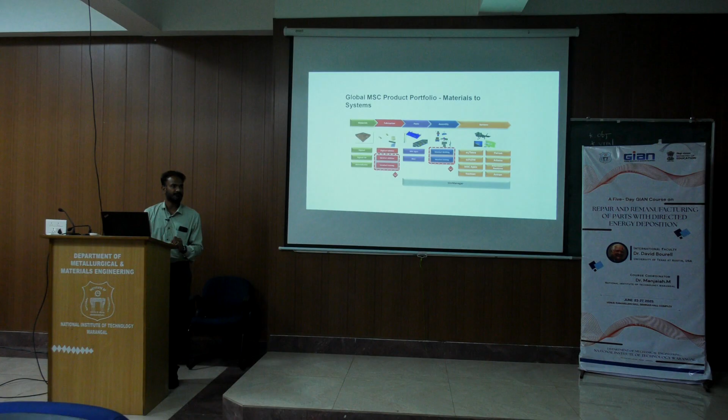And then system-related things. System-related things is your FEA analysis, like CFD analysis or structural analysis and so on. We have scFLOW for CFD analysis and Nastran and Patran for structural analysis. And people interested in multi-body dynamics, that is addressed by Adams software, and also acoustic simulations, which are addressed by Actran software. So these are the various tools that we have.

So now, since our point of interest is on Simufact, that is mainly used for additive manufacturing solutions. So that is our topic for the day. I'll be giving you an overview of what Simufact is, and then we will proceed to the specific applications of Simufact for additive manufacturing, whether direct energy deposition techniques or powder bed fusion techniques.

So Simufact basically stands for simulating manufacturing, or we can say it's the manufacturing division of MSC Software. MSC Software is a part of Hexagon company, and they are doing the development for this particular tool. Simufact supports metal-based manufacturing processes. It can be welding or any kind of forming analysis, or additive manufacturing.

And the technology behind Simufact is nothing but the Marc and the Dytran solvers. These are multiphysics solvers which have been in the market for a long time. Marc is a multiphysics nonlinear implicit code, which is mainly working behind Simufact to solve our multiphysics problems. Then we have Dytran solvers also, which can be used in forging or hot forging simulations and things like that, where it is an explicit solver.

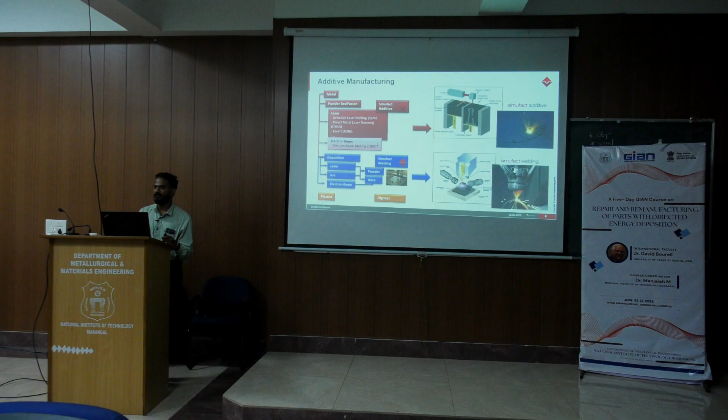The deposition techniques are nothing but our DED techniques, which I was mentioning in the morning sessions. All those can be solved using the Simufact Welding module. If plastics or composite materials are involved, we have a module called Digimat which can solve FDM or FFF kind of simulations using Digimat plastics. So these are the different modules or tools that we have to solve different kinds of problems. Coming to our next slide, I will give a brief overview.

Coming to the next one. So whenever we are performing metal additive manufacturing, whether it is a PBF process or a DED process, there are many challenges that come into the picture. Can those challenges be addressed by doing a virtual simulation? Or, in real life applications, to arrive at a result we might do several trials and errors using the machine or the technology, and then go back and do rework using physical prototyping or physical testing.

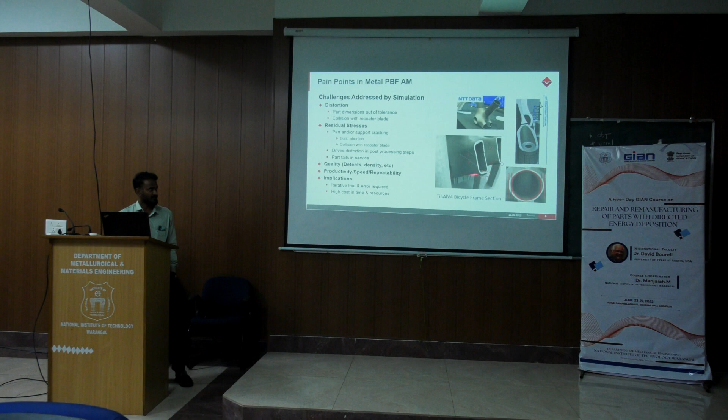Whenever we use powder bed fusion methods, we have the part as well as support structures. The support structures are much less dense compared to the part we are trying to manufacture. This can cause issues like cracking or failure, or parts going out of tolerance due to rapid heating and cooling as they are manufactured layer by layer. How can we address this? We can address it up to a certain extent by doing a simulation.

The additive manufacturing workflow to date is something like this: you have a design, suppose an automotive or aerospace component, and you want that design to go into manufacturing and then use it for your application. So we design the component and try to build it, using LPBF or DED methods.

We build the components, then inspect them for any failures or defects. Once you have identified defects, or something like a part going out of tolerance, we need to repeat this process again. We need to either change the design or modify the build strategy.

You have to modify your scanning strategy, or we have to modify our heat input strategy or heat input parameters. So this is a very cyclic process. We have to do many trial and error to achieve a successful component which is able to perform in the real life scenario. So this takes a lot of trial and error.

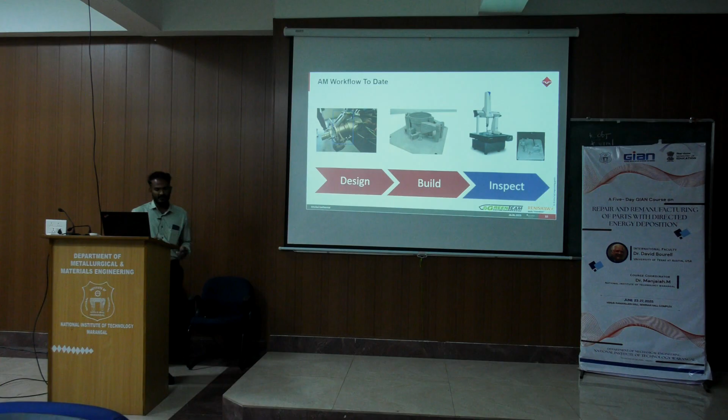So what if we can include an AM simulation in between your design and your actual build? We can create an AM simulation, and we can detect these kinds of defects in your virtual simulation, such that all these building and inspection efforts can be reduced. Okay, that is our main idea of doing a simulation.

So if you are able to find out these things using a virtual simulation, we can always go back to our CAD design. We can modify the design, or we can modify the build parameters, and then we can analyze it. We can arrive at a product, a build with less errors, which can be finally sent back to the build, and then we can continue our design or inspection process.

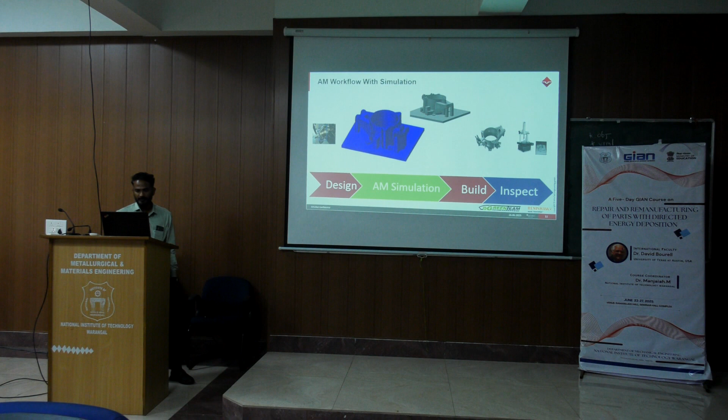So this will reduce our cycle in which we are investing in trial and error, testing or things like that. So there the simulation comes into picture. This is where we are going to use the simulation as an added or complementary solution to reduce the efforts in manufacturing.

So in simulation, there are several scales by which we can do the simulation. It depends on the type of simulation that you are doing, the kind of results that you want, or the computational effort that you are looking for. So here they have divided this into three main simulation types: macro scale simulation, meso scale simulation, and micro scale simulation.

So macro scale simulation is nothing but a purely mechanical simulation where we are trying to capture something called inherent strain, which comes in the components when the component gets printed. These inherent strains can be purely mechanical, and they can be material specific and machine specific, when we are talking about the macro scale.

So why we use macro scale is it is a very less time consuming process. We can easily do experiments to capture the material behavior to make your physical print, and it delivers the distortion and stresses. So if our aim is to study the distortion and stresses on the part, we can use the macro level simulations, which can be easily solved for additive as well as welding technologies.

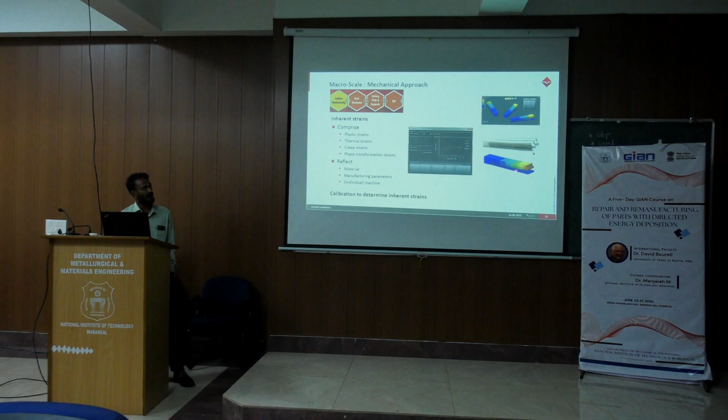Okay. So what we are trying to do here is, in the simulation we can't capture all your machine parameters. There can be n number of parameters when you are actually printing a part or using a particular machine. So how can we reduce all those parameters for our analysis so that we can match our experimental as well as simulation? That is what we are trying to do here in the calibration procedure. So after you calibrate, you can do the analysis.

So the analysis, as I said, can be the macro level, which is the mechanical analysis, or if you want to study the thermal analysis, where you want to capture the thermal behavior of the component layer by layer, we are able to capture it. So what does it enable us to predict? We can predict distortion, stress which is coming on the part, supports or the base plates, okay,

as well as peak temperatures, whether our laser parameters are giving us the right peak temperatures to melt the powder, or whether the proper fusion of the powder or the wire is happening. These kinds of aspects can be studied here using the heat flux and peak temperatures. Likewise, we can use the thermomechanical approach to study the part behavior.

So here we have a part which is getting built. Here we can see the layer by layer. This is a PBF process actually, which is solved using Simufact Additive. Okay. So here you can see we're building the part. It works on a technology like the element activation layer technology, where each and every layer is activated based on the type of input that we are trying to give here.

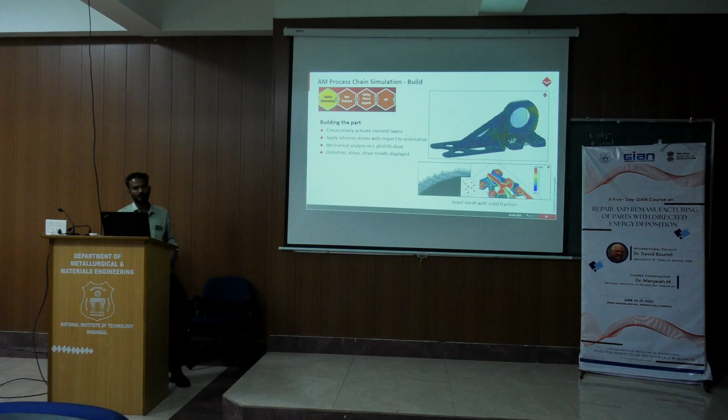Okay. So from this analysis we can study the distortion, stress, strain and displacement results, and we can study deviation. For most of the parts which are manufactured using the powder bed fusion technique or the DED techniques, the main challenge is addressing the distortions, as we had seen in the earlier talk given by Ajay. So how can simulations be used to reduce these kinds of distortions? We can study using these techniques.

And in addition to that, the part might be subjected to something like heat treatment, because initially when you build the part it can have residual stresses which are highly responsible for cracks or failure of components during the operating cycles of the part. So heat treatment processes can relieve the stresses. So we have methods to relieve the stress using heat treatment techniques.

Whether it can be something like stress relief heat treatment, or it can be specific heat treatment technologies which we want to simulate, something like quenching or HIP, technologies with respect to these temperature over time kinds of scenarios. We can simulate it using Simufact Welding as well as Simufact heat treatment knowledge.

So you can see here how the equivalent stress buildup will happen after the part is getting printed, and after the heat treatment is done, how the stresses can be relieved from the part, which will improve the material characteristics of the component. Okay. So for this we have several creep laws, etc., which can be input into the software. Based on these creep laws, it will calculate the stress relief heat treatment.

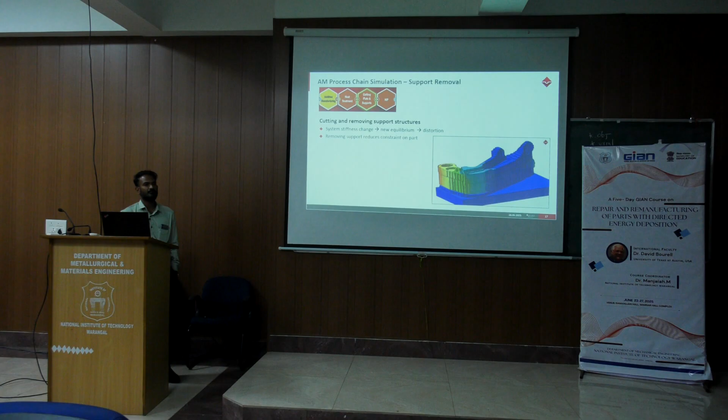So sometimes we use the base plate, we do the heat treatment along with the base plate, and then we take the measurements after cutting. So several methods can impart several differences in the behavior of the components. So those kind of things can be addressed using the Simufact modules.

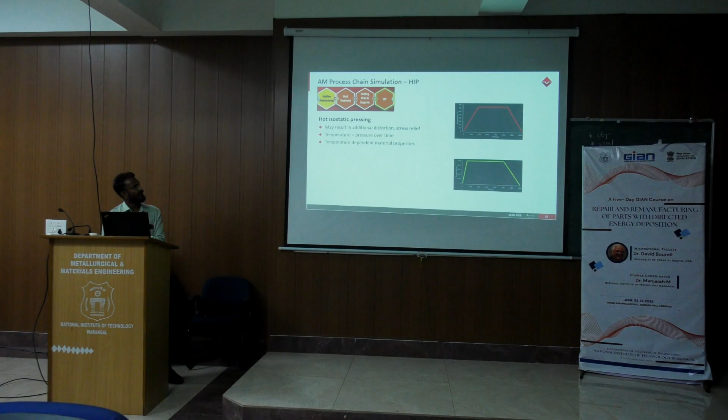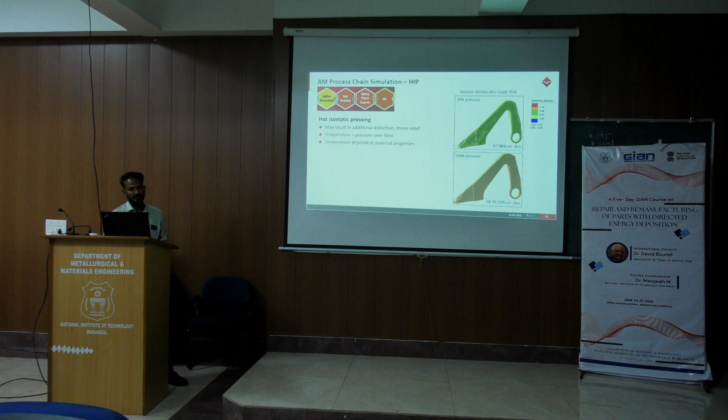And then we can also study the hot isostatic pressing heat process, which is most commonly used in powder-based manufacturing processes, where we provide the time as well as the pressure over time data, and we can study the relative density of your build before as well as after doing the densification. So it uses some densification formulas to arrive at the relative density of your part.

So all these things can be used to optimize your AM process chain. So mainly it involves additive manufacturing, or whether we are doing a heat treatment, then we are cutting and removing the base plate, or doing a heat process. Everything can be analyzed virtually in the Simufact Additive environment.

So how it helps is, for example, we have to do these different scenarios in a physical way. For example, let's say we are having a part like this. We have a few support structures which are modeled here, and we are trying to print it. Then we find that there are some distortions coming on the part. So let's say we are telling, okay, the support structures are more. We want to optimize the support structures such that we get less distortion at that particular part.

So how can we use this simulation? We can use the simulation to do support structure optimization, to optimize the amount of support structures or the areas where the support structures are necessary to reduce these kinds of defects or issues which can come in the reliability. So support structure optimization as well as part optimization can be done using the Simufact Additive tool.

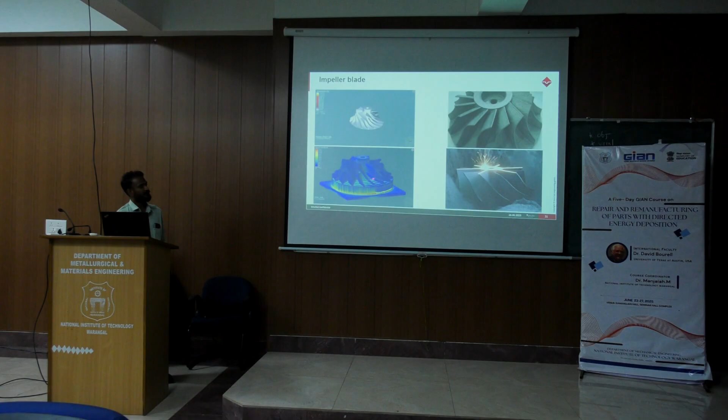Here we can study the temperature distribution as well as the effective stresses when you are building up. And also you can see the stresses that get involved during the different aspects of the build. So after the build we are doing the cutting operation, and then the support removal will happen. So at the end we can study the stresses which are coming on the component.

So here we have the component, and it is something like a suspension upright bearing carrier. The goal was to get this part printed using additive manufacturing technology, and whether this would be feasible or not. So if you take an automobile or vehicle like this, whether the component will survive the loads which are coming on the vehicle or not, we have to study. That too by using a

powder bed fusion technique. So here the material used was Ti6Al4V, the titanium powder, and tool steel was the base plate for this particular build. And it had around 5 lakh elements, and around 82 layers of elements. And the thickness of the support is 0.3 mm.

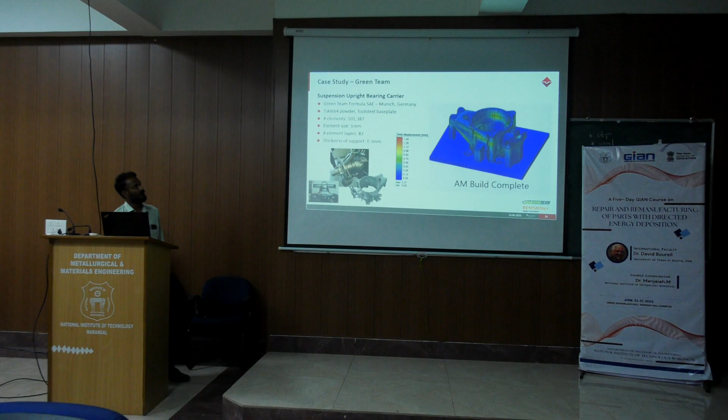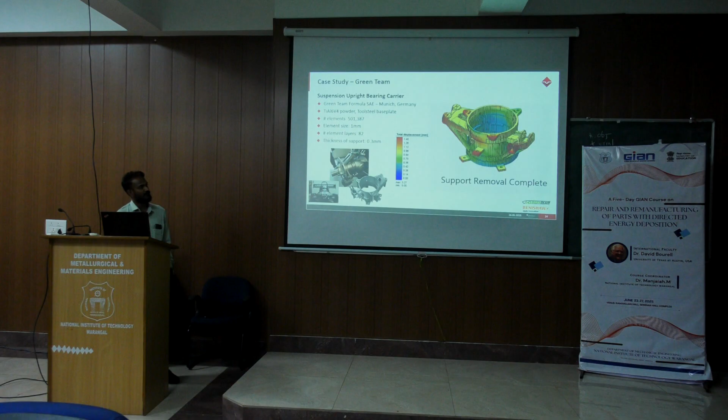Okay. So these are the inputs that we need from an FEA perspective. We need to discretize the model and make the necessary element count so that we can study the behavior of the component when we are building the part. So on your screen you can see the component getting built, then the base plate is removed, the support structure removal is done, and then the further processing is done.

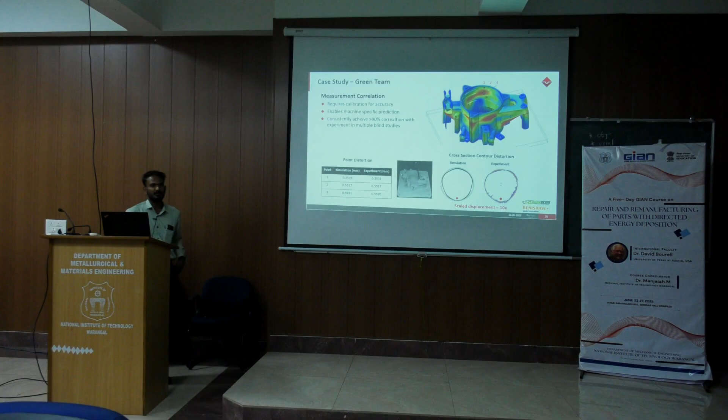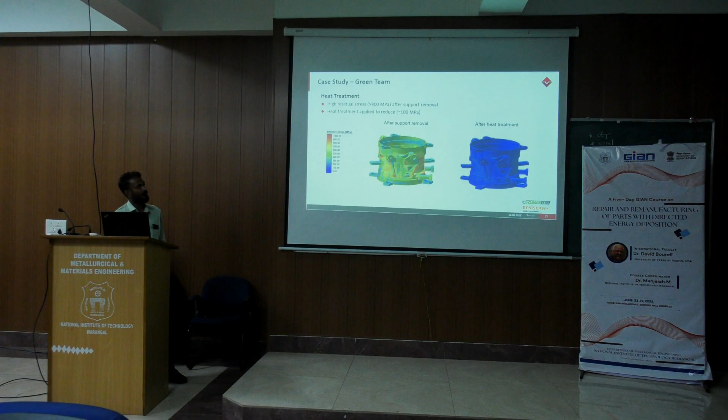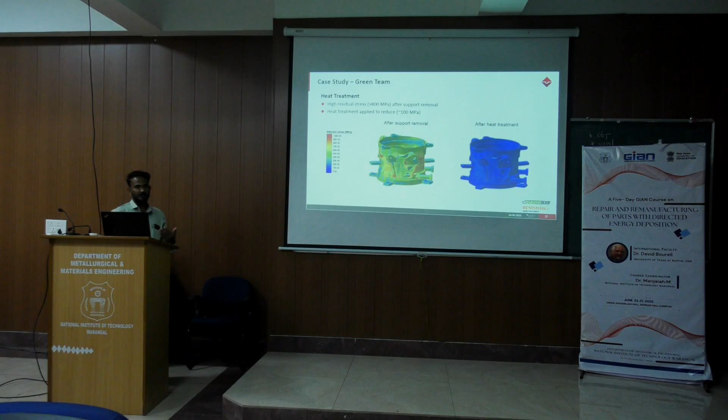So this was done for different stages, like the build stage, base plate removal stage, and support removal stage. Different studies are done with respect to residual stresses as well as displacements. And heat treatment has to be done because building any component using laser-based techniques will involve residual stresses in the component. So how to relieve those? We have to use a heat treatment cycle to remove the residual stresses. So that is being shown here.

Then one more aspect is cracks, like a crack which is forming between the support structure and the component. So that can be predicted using the software. Simulation can predict cracking at local locations like these, or we can identify high risk locations and conduct a virtual trial to reduce the risk.

So after building the print, if you are finding these kinds of issues, you have to go back and modify your input parameters. That will involve the cycling process again, using material and the time required to build these kinds of components. That can be very much reduced if we are doing a simulation, where we can identify such issues well in advance. Okay. Then another aspect would be, even if you have built a part, like we had seen this morning, we are doing optimization studies to make the components lightweight in nature.

Okay, lightweight in the sense like using additive technologies, where the conventional part, which is shown something like this, can be optimized with respect to the weight such that we can remove material from the component, while maintaining the performance or strength of the component, so that it performs in a similar way as the real or conventional component.

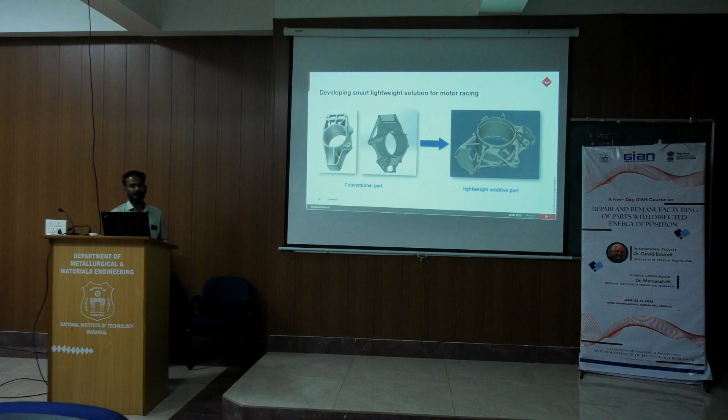So for that we do topology optimization studies, where we use the loads and constraints on the component to study where material is not required so it can be removed, and then we build the part, we study the part, and finally we decide whether we can use this particular part for the actual component. Okay. So for this several studies can be done.

For example, using topology optimization, we can make multiple design concepts like design variants. Okay. So the topology optimization tool will give you a number of design variants. In these different variants, if you observe, there are slight variations in each and every design. So which is the most apt or most suitable design you can use?

It has to be studied using virtual manufacturing as well as further FEA analysis. It can be stress analysis or fatigue analysis. Several analyses have to be done to arrive at a solution. So that can be done further to the printing or the virtual printing analysis.

So in this virtual printing analysis, when we are getting these different variants, which is the best variant we can pick? Some variant might give you less weight, but it may not be feasible to use aesthetic-wise or part performance-wise. It cannot be used in the real-life scenario. So we cannot always judge based on the weight reduction.

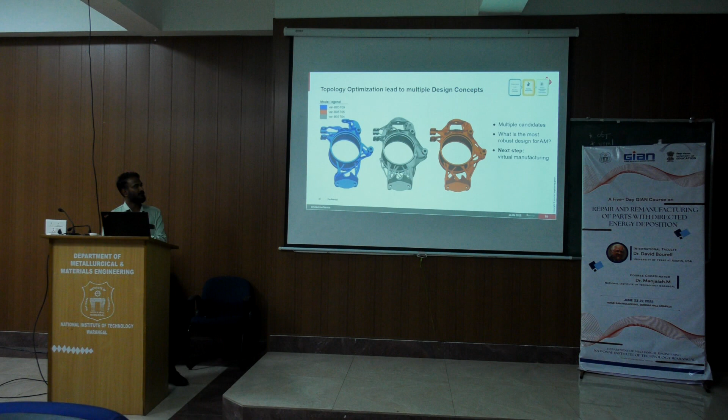We have to consider many other aspects, like multiple FE analyses, whether static analysis or dynamic analysis, and then we need to arrive at a particular design. Okay. So here topology optimization will help us optimize the component with respect to material using a topology-based optimization algorithm. Here we use a tool called Apex Generative Design.

There are several tools in the market, and one of them is Apex Generative Design, where we use the initial CAD design, the design constraints and the loads to arrive at the design by material removal, using generative design kind of techniques. So here you can see the component where the material is removed wherever necessary, and retained wherever there are design constraints.

It can be constrained locations, or it can be the component faces we want to retain. Those parts it will retain, and then it will create a generative design based on that. It will give you a smooth geometry which is ready to print. So you can export this as an STL file or a CAD file and feed it into your additive manufacturing simulation using the laser-based technique.

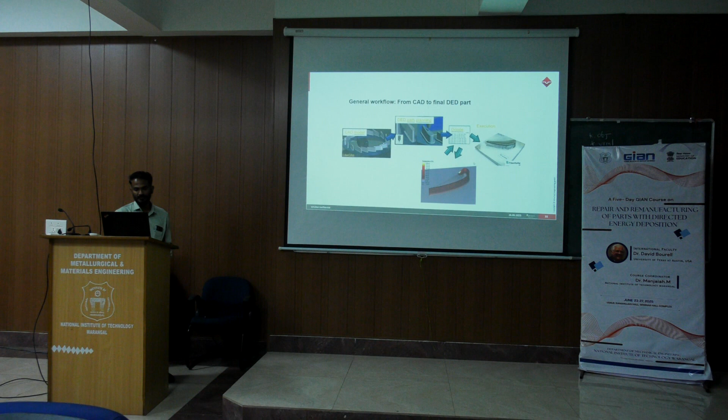So can simulation come in between, and can we make use of simulation software to reduce our efforts in metal deposition methods? That is the main criteria. So why do we need a simulation? We are already doing physical trials in our day-to-day life. Why do we need simulation, and how does it help us?

If you are doing the physical print and you plot design and process against confidence on a graph, you can see that we are very uncertain how things would end up when we are doing a physical build.

Okay, we have to do n number of physical trials to arrive at a simulation, or to arrive at a specific output, which can be time consuming, which can be expensive, because we have to use a lot of material to print these kind of components, and it requires physical parts to be printed. We need to do many tryouts to arrive at some solutions, as well as limited design changes.

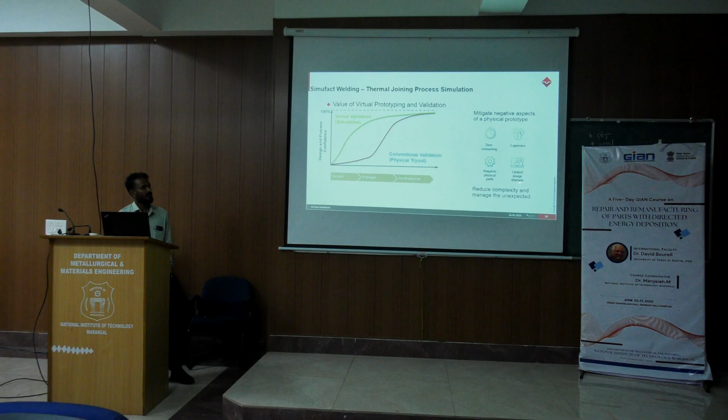So since we have to print this part each and every time, it will involve a lot of effort actually. So that will limit our design changes, as well as the freedom to choose the design, or whether we have to change something, we have to do the things all over again. So these kind of things can be addressed using the simulation. So DED manufacturing is complex and can be very difficult to predict. So that is why

the simulation or such kind of FEA simulation can be used, or it can be complemented along with your physical printing, mainly because the DED quality can be impacted mainly by the thermal management strategy. Like for example, if you are using the heat source to melt the component or melt the wire or powder, whether the heat, the laser parameters, the laser speed, scan speed, everything is appropriate or not.

Okay, if it is not appropriate, it can cause overheating or underheating, and based on that, it can affect our end result, which can lead to distortions or many manufacturing issues with respect to the quality of the component which is getting produced. So that is why this can be very challenging. It can be impacted by this thermal history, and it can be impacted by residual stresses.

We saw in the earlier slides how the residual stresses build up when we build the component actually, as well as base plate deformation. So whenever we are trying to build a component, we have a substrate or a base plate on which we are trying to build the component. And as we build the component, continuously we are heating and cooling. So this continuous heating and cooling involves a lot of material characteristics which get changed during the part formation as well as during the base plate deformation.

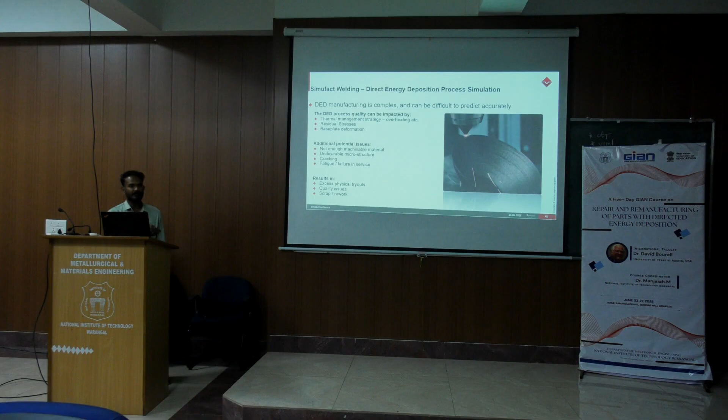So what we do is, we have all these issues. To address these issues, we often use physical trials. With excess physical trials, scrap or rework becomes more actually. Okay, many things get failed, and then you have to again start from scratch or step one. So that involves a lot of scrap and rework that happens in these scenarios.

So virtual tryout. Virtual tryout is something like which is shown here. So here we have the base plate on which the part is getting manufactured. So the heat source can be laser based or wire based, or arc based techniques. We can use either of the techniques to build the component or simulate the parts like this. So from this we predict DED process outcome like thermal, distortion, stress and strains. Okay, and then we understand the outcome before any physical trial.

So for example, if we try to build the part and we measure it using some measurement, we find the part is going out of tolerance. So how do we do that? Like what parameters we can modify to bring the part into tolerance? It can be something like a scanning strategy that you are trying to use, or something like a G-code modification that you are trying to make, that can be studied by simulating the manufacturing process.

So here we can study many things like power settings. For example, the power that goes into the simulation or the printing, clamping or fixing strategy. So wherever you are clamping these components, based on the clamping strategy, the distortions also might vary in real life.

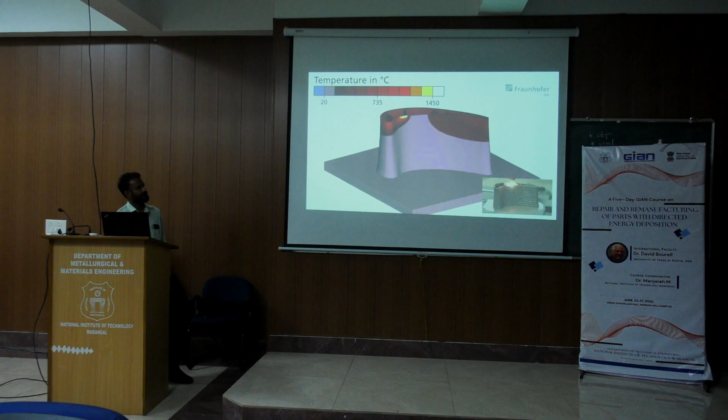And we can study stress, distortions, as well as strains and displacements on the components when we are trying to build it. So this shows different heights when the part is getting built. At the end, we can see the stresses which are developing on the part when it is getting built.

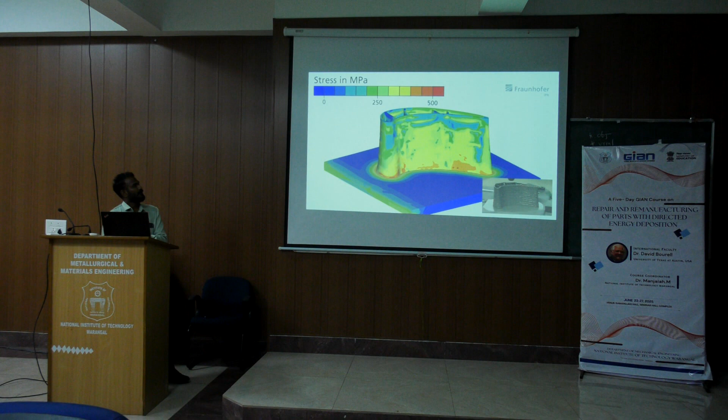So here we have a sample which is getting printed on the base plate. Here we have the convex side and the concave side, and the dimensions: 30 layers with 18 mm of total height. After printing, they have validated this for the deformations coming on the component in the experiment as well as the simulation.

So this is a comparison study. A research paper is available; if you require, we can share it for your further information. And this shows the simulation on the part, the distortions after printing, like lifting from the base plate or outward bending deformation when we build the part. After a certain height, it has started to distort.

So this shows a simulation versus a 3D scan of the component, where we can compare the out of plane deformations in the simulation as well as the 3D scanned component. So we can see a similar kind of behavior.

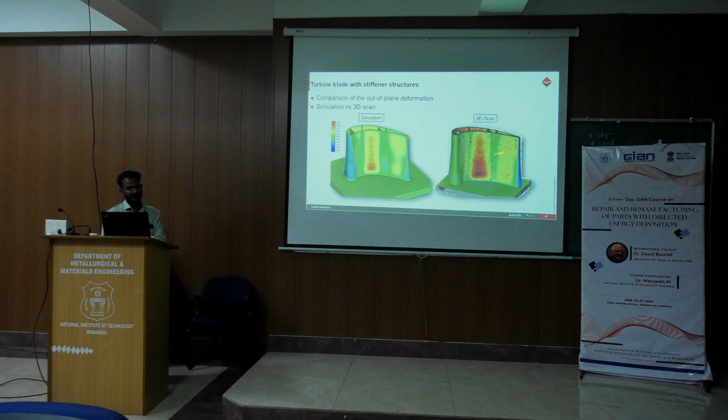So validation is done for a particular square geometry with 3D scans. So here we can see the part getting printed inside the software, and we get the result from here. And we are also actually printing the component on the base plate. We are getting the scanned data, 3D scan from the part. We are comparing the 3D scan with the simulated data.

Okay. And this can be done within Simufact Welding, where we have the distortion compensation tool, where we can do a shape comparison between the simulation and scan data. So after doing the simulation, whether your simulation is matching with your real-life print, you can make a comparison study.

You can get the scan data as an STL file, we can import it in the Simufact Welding software. We can simulate the part in Simufact. We can compare the two parts and we can see how much deviation is coming between the simulation and the scan data. So ideally we should be getting a close correlation between the actual build and the simulation.

So here one more thing is for DED, with most of the tools we face challenges in getting the laser scan path or the scanning path. Okay, that is a very difficult path. Earlier FEA codes were defining these paths manually by defining the path, defining the distance, or getting inside the tool, and then according to the coordinate systems we were trying to define the path in the tool, and then we were trying to import it.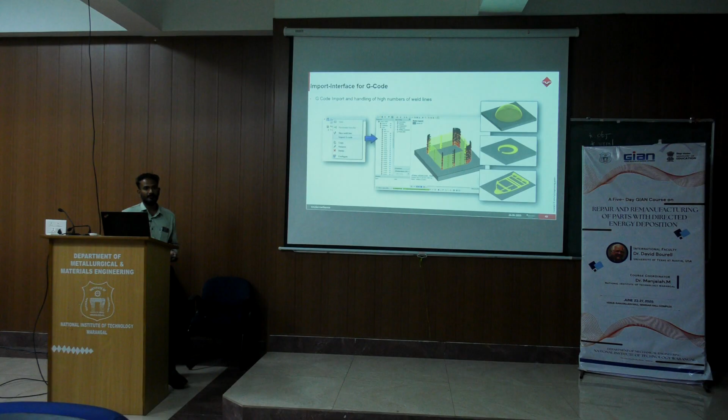Then transient solution. So as we have the scan paths and the input here directly, we can define our heat source. It can be laser based as it is shown here, or it can be arc based, like the Goldak model which we use generally for arc welding, or it can be a cylindrical laser beam which is used as a heat source. So we can model this using Simufact Welding, and we can start using it.

Okay. Then we simulate it. So this shows the simulation. It has taken the G-codes and it has taken the heat input parameters as an input, and it will build the component.

And another thing would be element sets. So for each and every layer that you are printing, we have to give a set of elements. Since at the end of the day we have a finite element simulation, we need to have a certain number of elements at each and every layer of your build. Okay. So generally we use finite element codes to generate the finite element mesh.

So here at Hexagon, we are using the Apex tool to generate the finite element mesh. We can also use other meshing tools like HyperMesh, ANSA, many of the popular finite element codes that are there in the market. We can use those to create the mesh, and then we can automatically assign the elements to each and every layer that we have in the deposit.

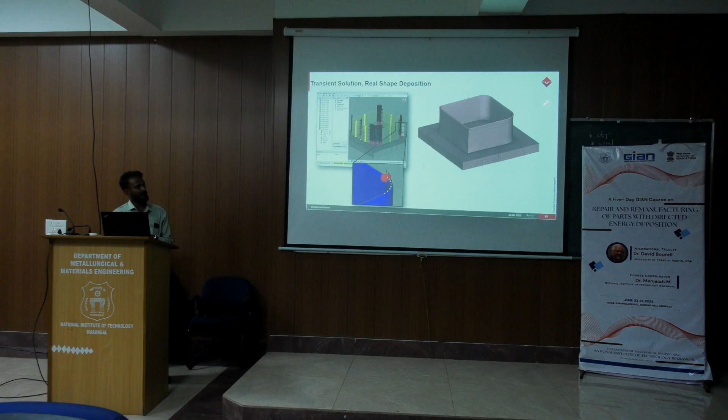And also we don't have to worry about contact-related things, because earlier in normal software or FEA codes, we were generating each layer, trying to import it, and trying to define the path. So here what we can do is we can mesh the entire component as a single component like this. We can readily import the entire component, and inside the tool itself we can segregate the paths based on our layers and our requirements. Okay. So here it shows the scanning path which is taken from the G-code.

So this shows something like a larger model. In this larger model also we can try to capture the scan strategy, and we are trying to build the component edge. So they have solved even models with over 2 km of build length without grouping the layers. The G-code contains over 80K single linear movements.

So the size of your model is not a constraint, but computational efforts can be a constraint. So you may need to have larger machines to solve these huge problems, because FEA code at the end requires computational effort to solve these kinds of problems.

So this shows a nozzle cone model. I think this morning we have seen a similar kind of model. So the simulation happens like this. Here we have the laser blown powder DED. It took something like 48 hours of solver time, this particular model. And we are using the laser-based heat source to simulate this particular component.

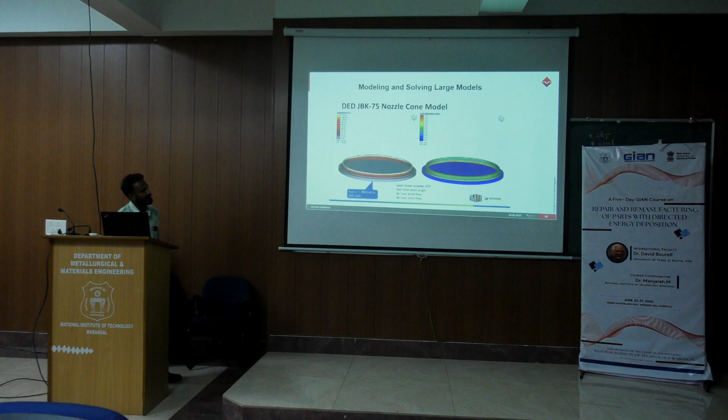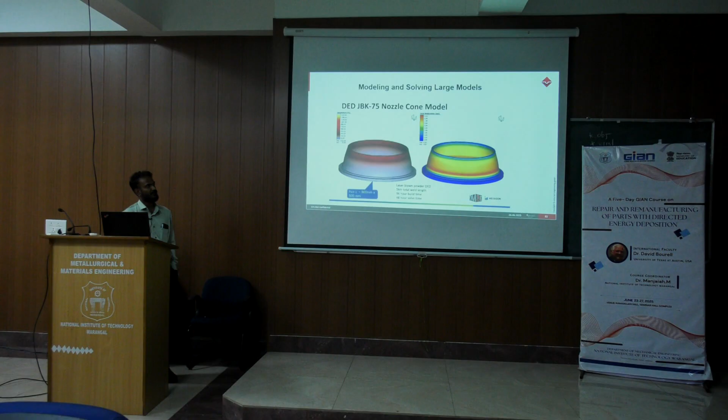For example, if you have to build this part, it will take a lot of time to simulate this. You see this 48-hour simulation time. So to reduce this, we have certain methods, like we don't have to use an entire moving heat source. We also have thermal cycle methods, and these kinds of reduction methods where we can readily simulate using simplified techniques to reduce our calculation or solver time.

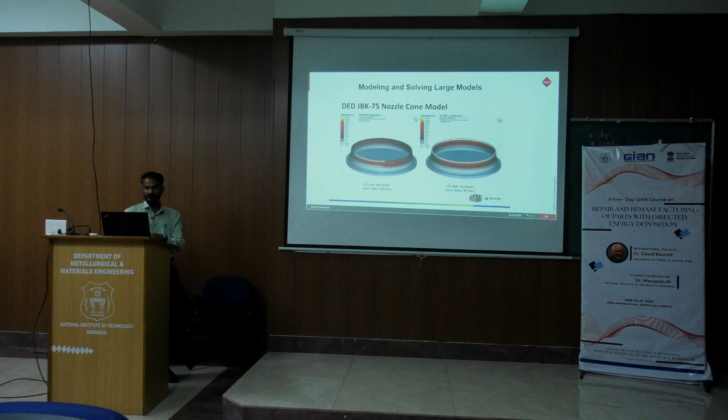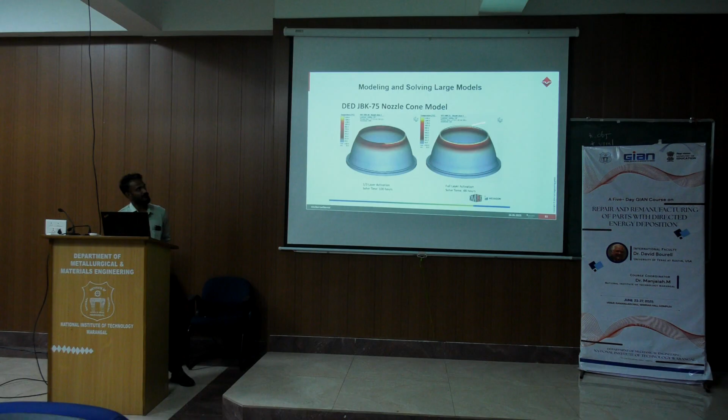So this can be done using the simulation. This is called the ATC method or thermal cycle method, which will reduce the simulation efforts for the components.

So next we can see here there is a repair operation. This morning we had seen how they are using DED for repair. So if we have the model which needs to be repaired, we can readily bring it, and we can define our scan paths. We can make a thermal study, or we can make a thermomechanical study

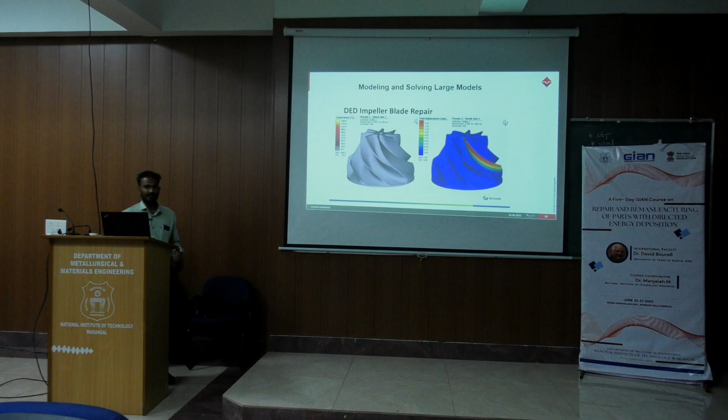of how the metal deposit which is happening here can bring considerable deformations or any kind of issues in the part when we are trying to repair the part. So these kinds of repair studies also can be addressed using the Simufact Welding module, where we can use the DED techniques to do that. So this also can be addressed using simulation.

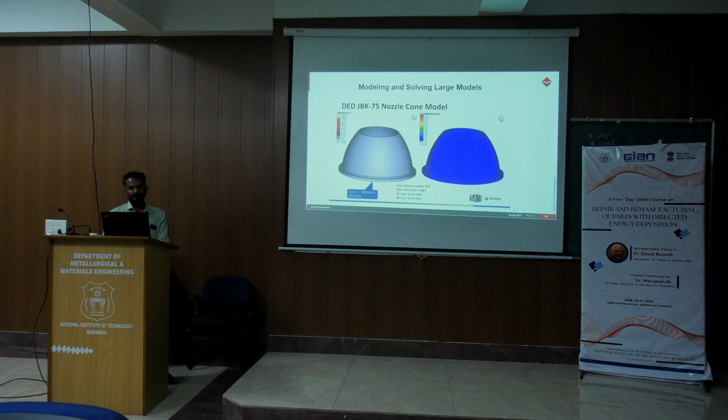Okay. So whenever this is happening, what we can infer is, when you build the part in a real scenario, there can be chances of delamination. So delamination can happen between the base plate and the part. This can be well addressed. For example, before building the part, if you do this kind of study, you will come to know that this kind of scenario or scanning strategy can cause this kind of stress or maybe delamination in the part. So according to that, we can change the laser parameters or input parameters to avoid these kinds of things in the real printing.

Okay. So there is a comparison study with respect to the temperature and the height, or the temperature and the thermal cycle.

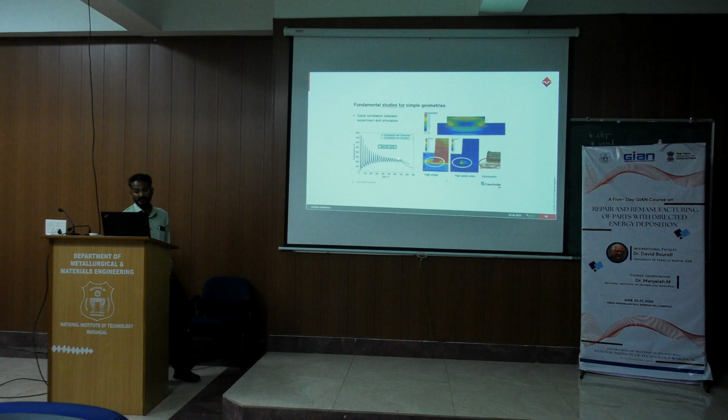At a particular point, we have captured the temperature, and several cycles are captured here. They have shown that the simulation and the experiment are correlating. Slight deviations might be there, but at least we can get the behavior in a proper way compared to simulation and experiment.

Then another study is distortion, for example X distortion. After you go on building the part and then you pull it down, due to shrinkage effects there will be distortions like this, which normally come in the DED processes. So how we can simulate that using the simulation, and how they are correlated for the displacement in the positive X as well as the negative X. If you see the coordinate system here, this is the positive X and this will be the negative. So they have made some comparisons.

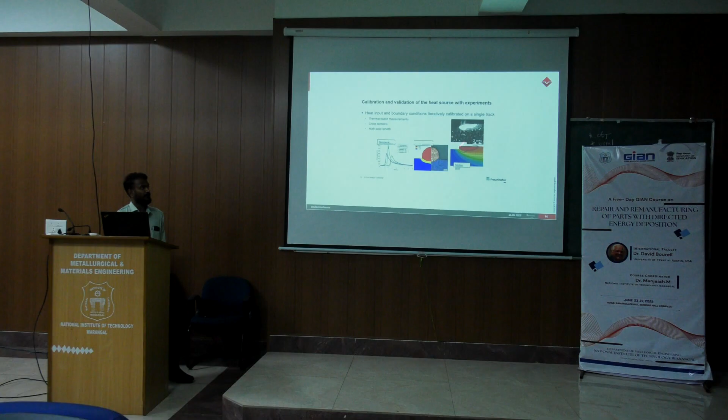Next important thing would be your heat source, how we are going to model heat input and boundary conditions calibrated on a single track. We can make these kinds of studies where, after doing the welding, we can take the weld micrograph and study the heat source with respect to the weld micrograph as well as the simulation. We can extract this data as a weld monitor in the simulation, where this shows the weld penetration in the simulation, and this shows the weld penetration in the actual welding. So this will also help us in defining or calibrating our heat source.

At the end of the day, we need to get a part printed in the simulation which is close to our real life printing. So we try to calibrate the heat source with respect to the experiment as well as the simulation so that we match it closely to our experiments. This kind of thermal calibration study can be done in the Simufact Welding software, where we study the melt pool characteristics using the simulation as well as the measurements coming from the experiments.

Advanced thermal cycle is one technique we can use to reduce our simulation time. For example, if you are trying to build a very large component, mostly in the DED techniques. DED is used to build large components which are not possible in the laser based powder bed LPBF process, because it has limitations with respect to the powder and the size of the component we can build. Normally the maximum base plate dimensions of powder based machines come up to 400 by 400. Beyond that, we have to look at using the DED approach.

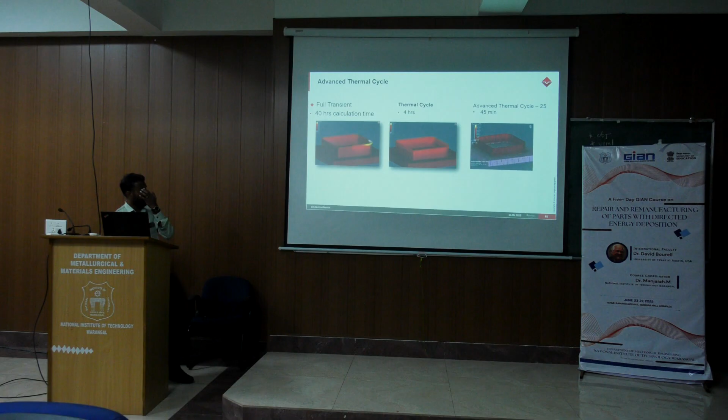So we can give different factors to this. If you give 50 and if you take 200, it will solve much faster. But it depends on the time and effort that we need to analyze this.

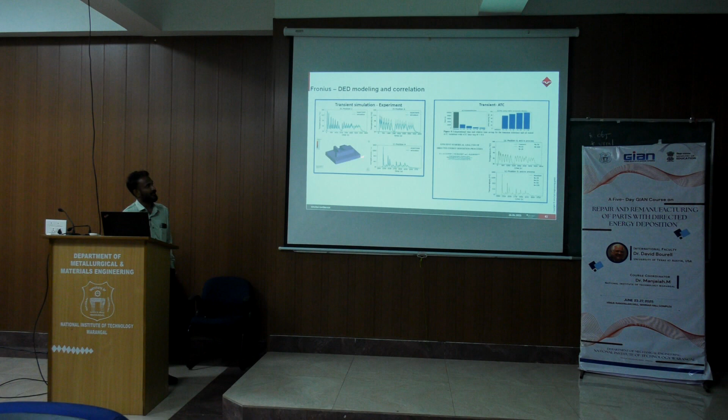So the thermal correlations at different positions, position number 2, 6 and 9, which we saw in the previous slide. So here we have different positions at which we are trying to track the history of the component. Here we can see a time versus temperature graph. We have the simulation data as well as the experimental data which shows the correlation.

The dwell time between the layers? Yeah. It's possible to improve the dwell time. Yes, between each layer, we can. And over practically what we are going to do physically? Yes. If we compare it with other methods, how easily we can? Yes, that is the idea.

For example, if you are doing a study, you might be unsure what is the best scanning strategy, whether it will cause any issues. If you do a simulation, you will come to know it prior to printing it. Then you can modify the strategy and start with it. Yes. We can do some iterations, some comparative studies, trial and error, modify, and study like that.

After the deposition, is it possible to study the mechanical properties of the wall? For example, the tensile strength of the wall? We can study tensile strength, but for that we would prefer to use a multi-phase material, and then we can create a weld, take those results and do a tensile study.